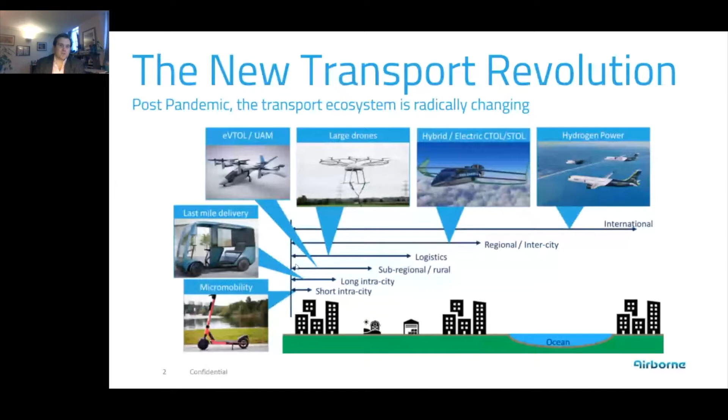So just in context of all the other barriers, we've seen most of these, and in previous eVTOL Insights presentations, we've seen a lot of discussions around them. Everything from product differentiation, access to distribution, and we're starting to see vertiports and other such infrastructure being looked at and trialed.

Capital requirements, there's an awful lot of funding coming into the markets at the moment. It's going to be an interesting one to see whether that actually carries on past the prototyping and the certification phase. Is the capital still going to be there when it comes to actually bring these to widespread use?

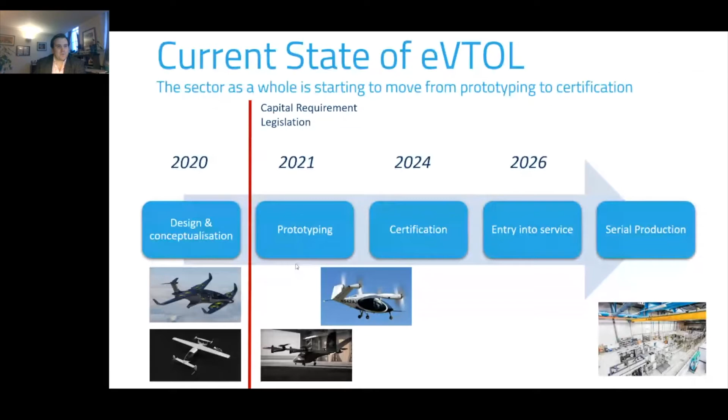So at the moment, moving from design and conceptualization, capital requirements and legislation were the key ones. Can we get experimental aircraft to fly? Where's the money going to come from? We've covered those. Differentiation, that's starting to become important. It's already a congested market, and we're seeing more OEMs come online. So it's going to be an exciting competition over the next couple of years.

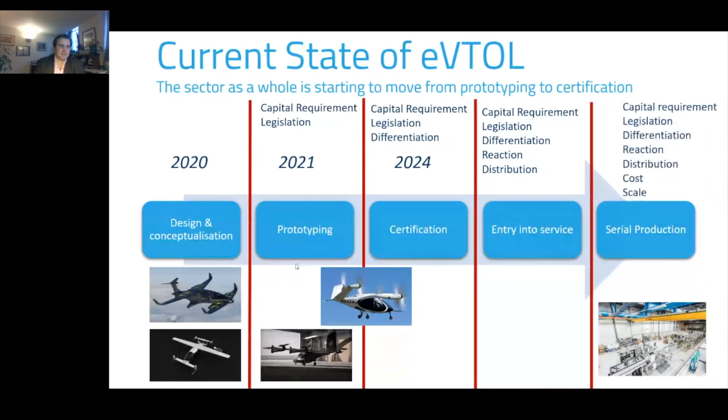As we move into entry into service, the incumbent reaction and modes of distribution, that's going to be more important. And then finally, as we get to serial production, that's when the cost and the scale become really critical.

The trouble is, although that's in the future, we need to start looking at those challenges now. And I've tried to illustrate this in this slide.

So with traditional automation, and here I'm specifically thinking about composites automation, which is where Airborne's area of expertise is. Traditionally, aircraft development programs and automotive development programs are long enough that there's time to develop the automated production processes either during development or during the ramp-up phases. So that means there's no gap in between needing to think about automation and production and the end of the design phase.

The trouble with the eVTOL is we don't really have time to do that, and the rates are so high, or the forecasted rates are so high, that actually waiting until serial production to start implementing automation and developing automation will actually be too late, and there's never going to be an opportunity to catch up with the demand forecasted in the market.

So really what needs to happen is automation and production development needs to start earlier. And this is also the case because the requirements by eVTOL are very different from traditional aerospace and traditional automotive.

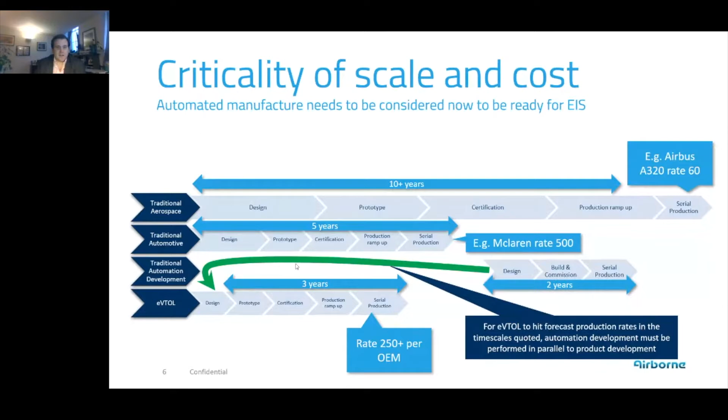So in traditional aerospace, the quality is very high, production rates are reasonably low, and cost is very high. And it's pretty much the exact opposite in automotive, where cost is key, very high production rates are needed, quality needs to be appropriate for the vehicle being designed.

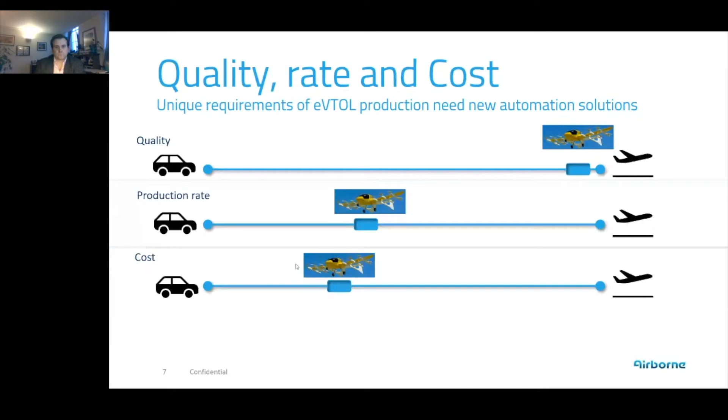eVTOL sits somewhere in the middle, so quality obviously needs to be up at aerospace levels because it's a flying vehicle. Production rates are going to be significantly higher than traditional aerospace, but not at the same level as automotive. And again, that cost level needs to come down to be able to hit those unit cost targets. So that's quite a challenge,

But there is a solution. And this solution, this whole concept of concurrent engineering, has been around for many years. And I've got an example coming up where I can show you that.

But the whole idea is that during the design phase, 70% of the costs of a component or an airframe or a product are locked in, which means that later on, automating or manufacturing the product becomes more difficult and more complex. So the general idea is bring that production development earlier on, so you can iterate with the design team to make sure that the end product is optimized for manufacturability, cost, production rates, and so on.

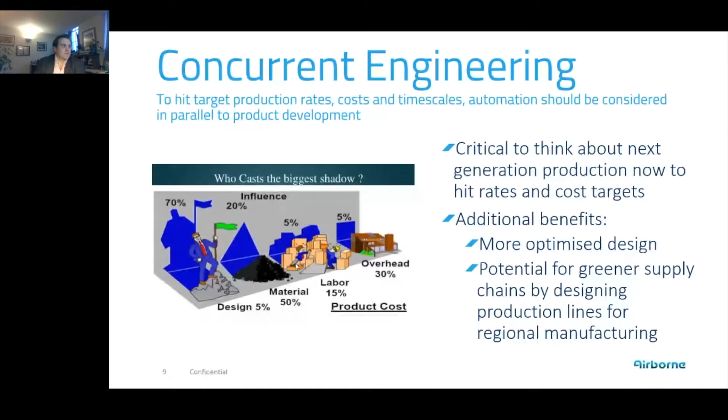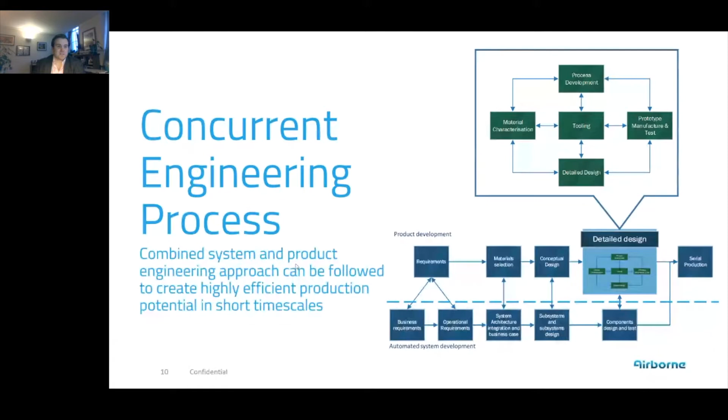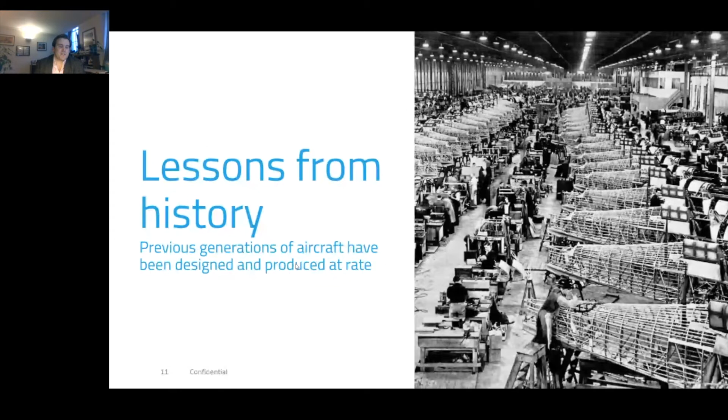This has been done many times before, and a good example is in the Second World War. The Hurricane was a lot easier to manufacture, so a lot more were produced at a much higher rate than the Spitfire. So there was a trade-off between the two: the Spitfire was high performing, but the Hurricane could be produced more quickly and more cheaply. Taking a similar approach but using automation means that trade-off between performance and cost can be changed to a certain extent.

So this is where Airborne's capabilities lie. We've developed a set of capabilities that means we can support anything from initial product development and process development all the way through to serial production or providing automation.

We're based in the UK and the Netherlands. We've been going for about 40 years, and we've got about 140 employees. We've done everything from automotive through to marine to aerospace, and any new market is very interesting for us.

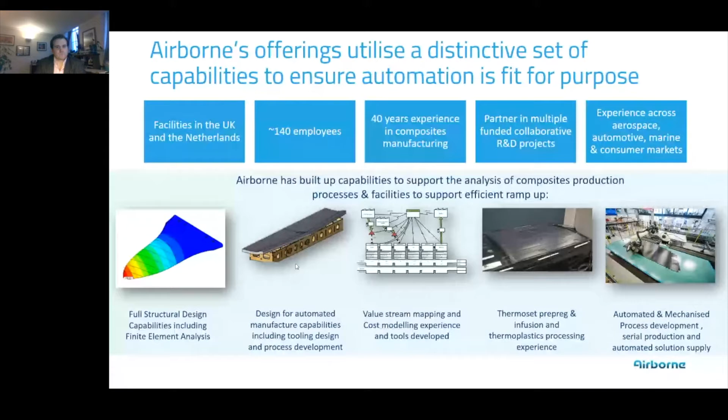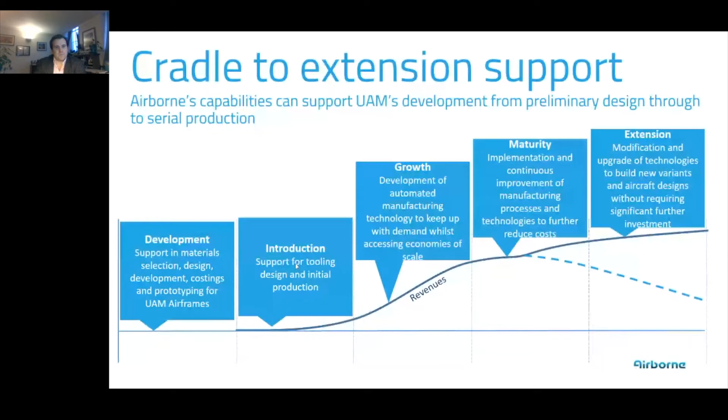The way that we can support is, as I say, anything from initial design and development all the way through to serial manufacture, with low volume manufacturing in between. We've got a low volume production site in the UK, and then we can either provide automated solutions to customers or partners, or carry on manufacturing ourselves. And the way that we do that is through this set of capabilities.

I think that's all the slides that I have on sales. So hopefully this will carry on being more interesting.

Prototypes are very important, and at this point, when you're prototyping, that's when you can have some influence on the design still, so we can definitely work on design for manufacture there. Something we're working on in parallel is automated manufacturing solutions, so they'll be ready for when UAM gains certification and entry into market.

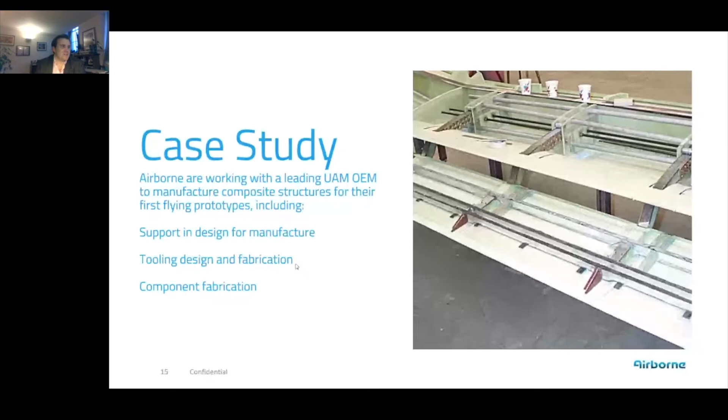This particular video, which I've sped up for the purposes of getting through it in the presentation, shows the manufacture of rotor blades.

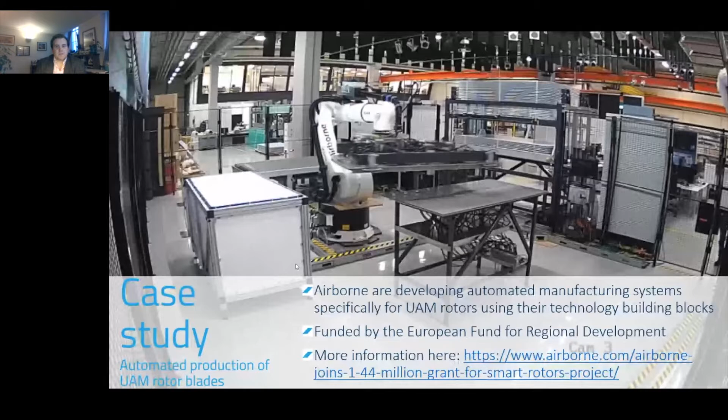Just to finish off, by moving this traditional automation development stage back towards the design stage of the product, we end up with something that looks a lot more realistic to actually reach the production rates being forecasted by OEMs.

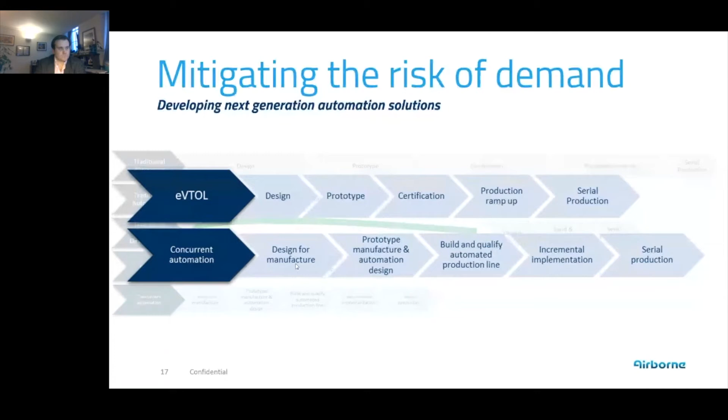And what this does is it means that supply can keep up with demand. In a market like this, where there are multiple competitors, if you can't keep up with demand, there's room for another competitor to come in and steal some market share.

The same happens with cost. If you try to automate and optimize production after you've frozen the design, unit costs may reduce slightly, but not to the levels required. By incorporating automation and production development during the design phase, there's an opportunity to reduce costs and hit the targets being forecast.

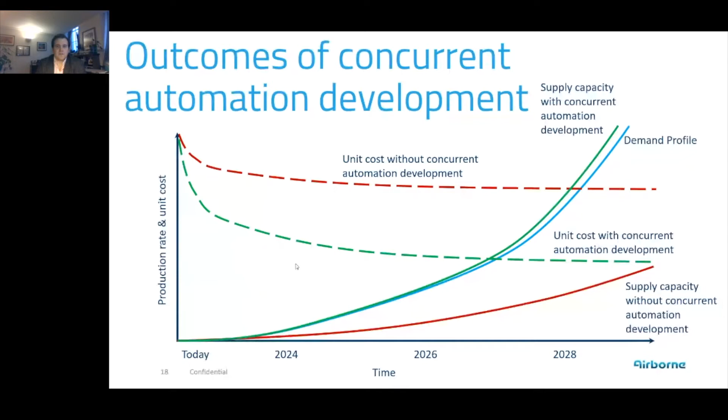So finally, the last opportunity I'm going to talk about is supply chain emissions. Global supply chains aren't green, so there's an opportunity in a new market to make sure supply chains are designed to reduce their length and minimize the amount of transport required between processes. For a production or supply chain to be truly green, there's an opportunity to incorporate automation and reshore production.

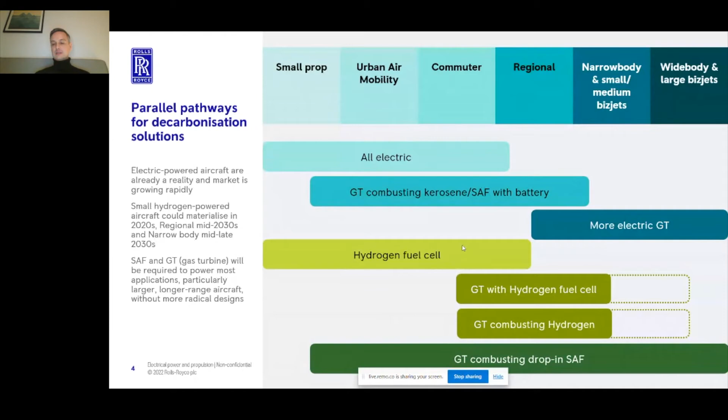However, today I would like to focus on the electrification efforts through Rolls-Royce Electrical, because it is a contribution to more sustainable aviation, but it's equally an exciting field where we see new business opportunities that improve mobility overall and how we think about aviation. Rolls-Royce Electrical is bringing that together in the group.

What we are working on is developing electric power and propulsion systems. So we position ourselves as a system provider to the industry. This is based on our deep technological expertise. Specifically with the acquisition of Siemens eAircraft, we brought on around 200 experienced engineers in electrical machine design, power electronics, controls, system architecture, system design, and system integration. And this combined as well with the long heritage of Rolls-Royce, with the certification experience and understanding of things like thermal management, which are really important in electrical and hybrid electric systems. We really have all the technologies you need to develop full power and propulsion systems.

And we're doing that in a way that we're working on a modular and scalable portfolio. So what does that mean?

If we think about the whole advanced air mobility space, from small propeller aircraft to eVTOLs and commuter aircraft, there are some things which are a bit more specific. We see that an electric machine for a fixed wing aircraft is different than an electric machine for an eVTOL that requires a lift application. But when you look at the power electronics, the distribution, the controls, the battery management system, these are all platform developments so that we can bring these into a broad range of applications and as well a broad range of markets.

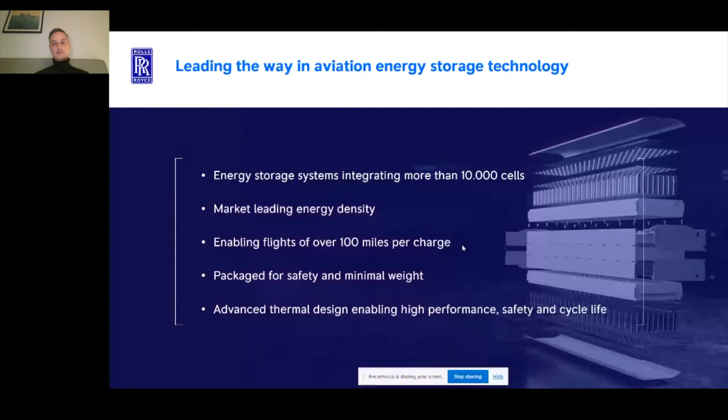We actually have already quite a lot of experience in that field. We've built various demonstrators. We've flown quite a lot of systems and batteries. You might have seen the ACCEL aircraft, the Spirit of Innovation, which just recently broke the speed record, achieving 555 kilometers an hour, or 345 miles per hour. And that's basically a battery with wings.

And we've learned quite a lot about high power densities, high power batteries, and the big challenges you have, for example, the thermal management and everything around that. So we've gathered a lot of experience on this and on other programs, and we're now bringing this into a development program that will deliver qualified batteries that are ready for certification for various applications. And we're designing that with certification in mind from the start.

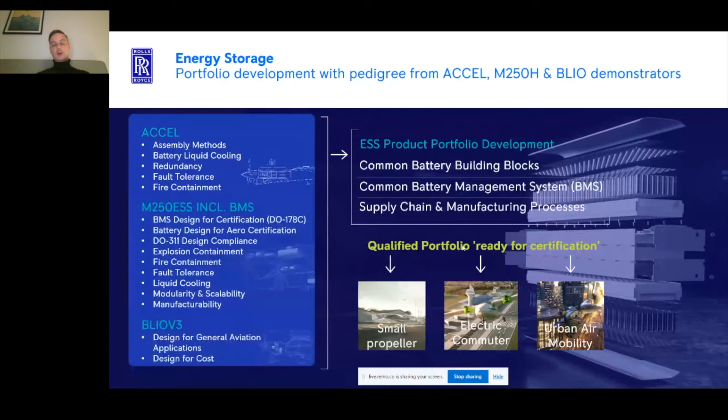However, we understand the limitations of battery technology, and we are also working on hybrid systems. And for that, we're currently working on technologies for a new turbo generator that will be able to deliver range extension for advanced air mobility solutions, so for example, for an eVTOL.

We see that there are a lot of opportunities to reuse engines from helicopters, from current APUs, from large aircraft. But we see an opportunity to design a turbo generator specifically for hybrid electric applications. And to have this future-proof, we want to design it to be sustainable aviation fuel capable, and as well capable of burning hydrogen in the future.

So this is something where we are currently talking to customers, trying to really understand the requirements, to understand what is the best product for hybrid electric applications to hit the market. And currently, for that new gas turbine, the ground run of a new technology demonstrator should run on the test bench later this year.

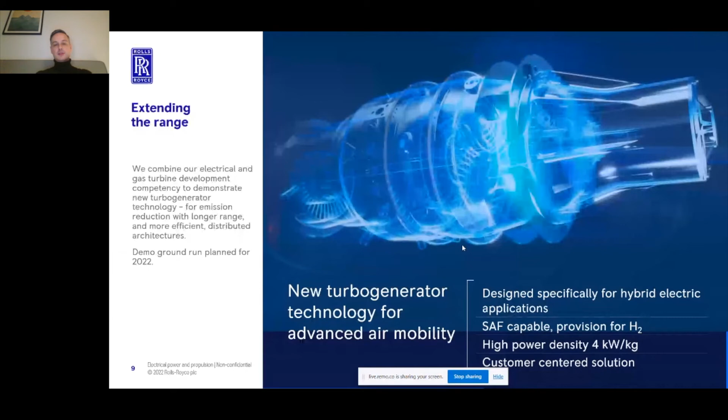So just to give you a little insight into whom we're working with in the advanced air mobility space.

I've already talked a little bit about the Spirit of Innovation, and here on the left-hand side you can see the beautiful aircraft, which is based on a kit aircraft. So it's the Nemesis NXT, and it was just an incredible opportunity to show the art of the possible with electric propulsion technology in a small airframe, really optimized for speed.

We have, you can see in the middle, a collaboration with Vertical Aerospace. We will deliver the units for that vehicle and the power distribution, as well as the high voltage system design. This is a really exciting opportunity and our first customer in urban air mobility, but we are already in engagement with other OEMs really to bring our portfolio into the market.

And in the commuter space, we're really proud to be part with Tecnam, the Italian plane maker, and as well in a trilateral setup with Tecnam and Widerøe, the biggest Nordic regional airline. The Tecnam P-Volt will come into the market by 2026. And we're teamed up with Widerøe because we see a strong pull from Norway to bring this into applications.

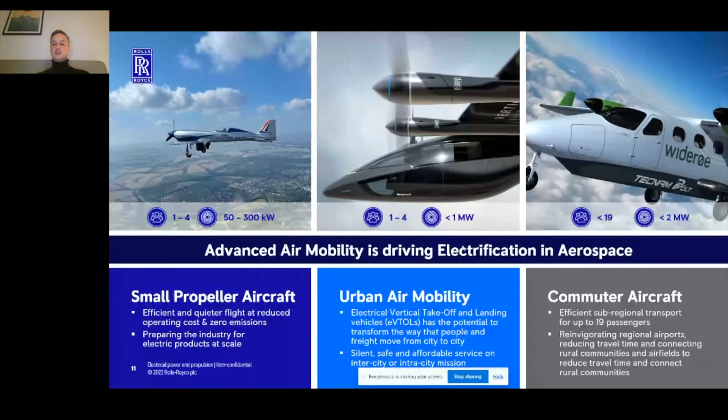Now I'd like to flesh out some challenges, and maybe some thinking we're doing beyond what we want to offer on the propulsion system side. Quite a lot was already discussed about things like public acceptance—we had really good presentations on this in the past. Certification is a really important topic. Today I'd like to highlight two topics around infrastructure and service.

If we look at advanced air mobility and the eVTOL space, based on a study from Porsche Consulting, by 2035 we will have 15,000 eVTOLs in operation globally. This will bring a lot of challenges. For this base case assumption, we'll need around 1,000 to 2,500 vertiports, and at these vertiports you'll also need charging infrastructure. Fast charging up to 1 megawatt, with a certain level of operations, means the energy demand quickly scales up—that's really demanding, not only for an airport but especially for vertiports in an urban environment.

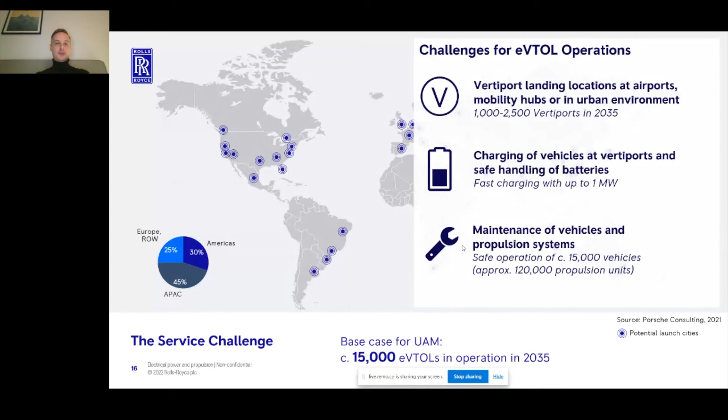On charging, we're fortunate that within the Rolls-Royce group we also have the Power Systems business, which is focused on decentralized microgrid solutions, and is already providing infrastructure to airports for backup power or to support fast charging of electric vehicles. We clearly see an opportunity to bring this to support vertiport companies and airports who want to scale up this infrastructure.

Now I'd like to highlight one topic: we would like to offer this in an energy-as-a-service business model, so that the airport or vertiport company could sign up for a service to get the energy or power they need to charge the vehicles, without needing to invest upfront in high hardware costs. We understand that for regional airports—or even larger airports—it's quite difficult to secure high upfront investments for a market where the ramp up of operations will be uncertain. So we see a lot of benefit in offering this differently than just selling hardware.

My last topic is some thinking around service for these vehicles. It will be quite a big challenge. We sometimes hear people talking about maintenance, but maybe not to the extent the industry should, because we see this as something really critical. We're currently exploring how we can leverage our existing footprint and service in Power Systems and in the business aviation world to support the industry with maintenance services, because this will be a big challenge given the fleets forecasted even in conservative base case scenarios.